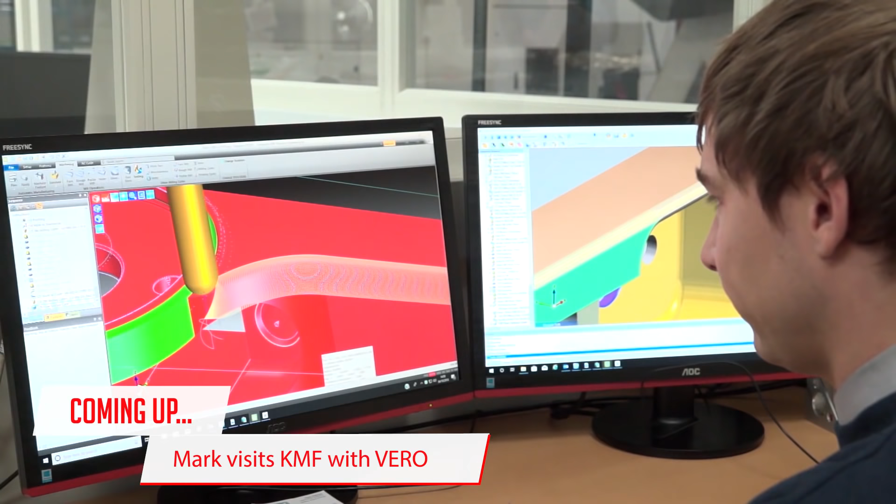We've got a wicked Swarf and Chips show today. The videos coming up are really informative, so it's definitely one to watch. But this is the first week we're back in the studio since Swarf 100. It was amazing, and there's always one that dresses up differently, isn't there? Not pointing the finger or anything. Oh, Colin. Oh, Colin. Top show, weren't it? Brilliant, absolutely spot on.

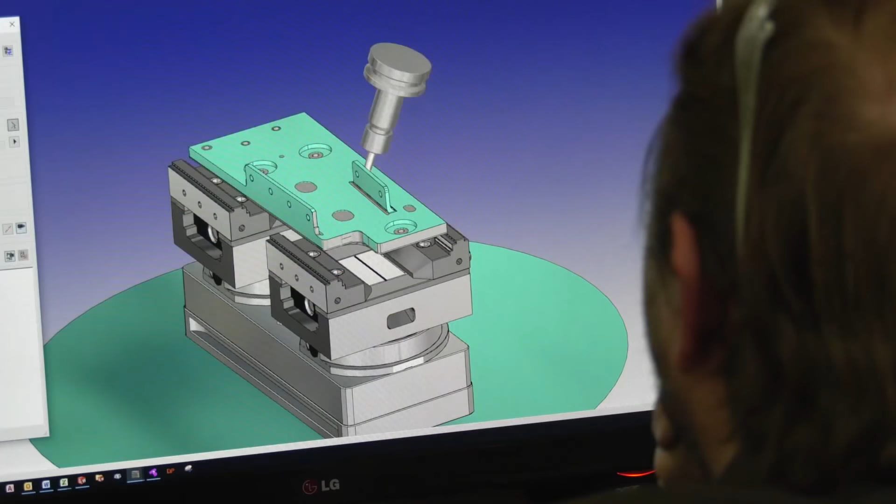Now, in terms of Hypermill, what did you say earlier about when it was machined the first time? Yeah, there was a lot of cycle stops being pressed. Obviously the trust wasn't there first time out the box. I think it took us 2.5 hours for a 40-minute part the first time with all the measurements. In hindsight, we could have hit the button and walked away and it would have been bang on. So you should have trusted it, really. Very much so.

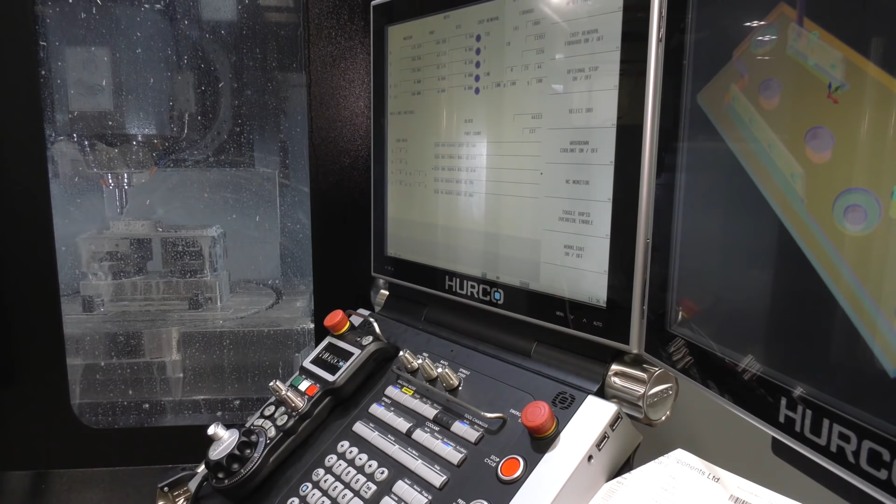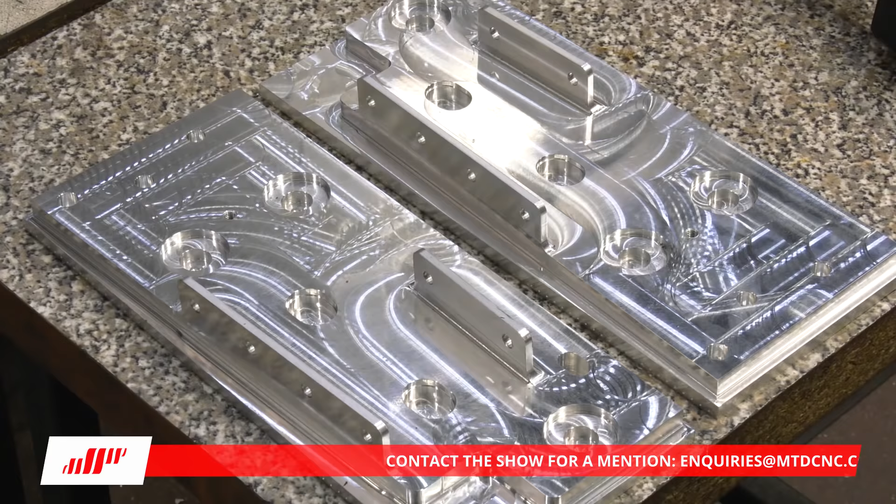But in terms of easy use, this machine and the Hypermill, easy to use? For the lads, yeah, they're pretty good. They've grown with Hurco controls over the last 10 or 15 years. The Hypermill, our CAD engineer Rob, he's took to it really well, and it really is phenomenal. So basically having machine and software together, just essentially making manufacturing your parts a lot more efficient. Very much so, yeah. Right, great endorsement of both products.

Back to studio. Oh Colin, it is so good to see Gareth and how happy he is. It's like me when I get a sticky toffee pudding, when he got his 5-axis machine.

Yeah, I'll say you eat that as well. It's disgusting. Oh no, don't be silly.

We've booted that off. Sorry, Mark, but I just wanted to showcase this video because the passion coming out of Gareth is just brilliant. Before, they were doing 3-axis, 3+1, now with this 5-axis machine they can still do the 3-axis work, it's just making things quicker.

It's just changed everything really, and that part you couldn't really sit there before. But here you can see - those were 2 degrees off, so you couldn't really do that. Loads of different fixturing, plus the software as well.

The fact they were standing over it next to the stop button, they didn't really trust it initially. They weren't, were they? They were a bit nervous. He was looking at the software, and when it was cutting, thinking that's not right, because he's a tried and tested engineer, as are all the guys there. But just the way it machined it, it's just changed everything for them.

And the cycle time reduction, I won't say because there is a cycle time challenge coming up, so watch this space. But just enthusiasm, passion, he loves it, you can see it. And he wasn't confident, and now he is, and it's proved it. I think this is going to take his company forward. We've seen the growth, and it's going to get bigger and better.

Yeah, and he wants to concentrate on subcontract work as well. Known for their hydraulic components, but this just takes them further.

I think he's passed on that passion to you as well. He's saying I'm not passionate normally. No, but I think your passion really comes out in this particular video. And I think this illustrates there's lots of different fifth axis machines out there now, lots of different options. But I love this one personally, this kind of configuration, because it's so flexible - you can use it as a 3-axis, a 4th axis, or a 5th axis.

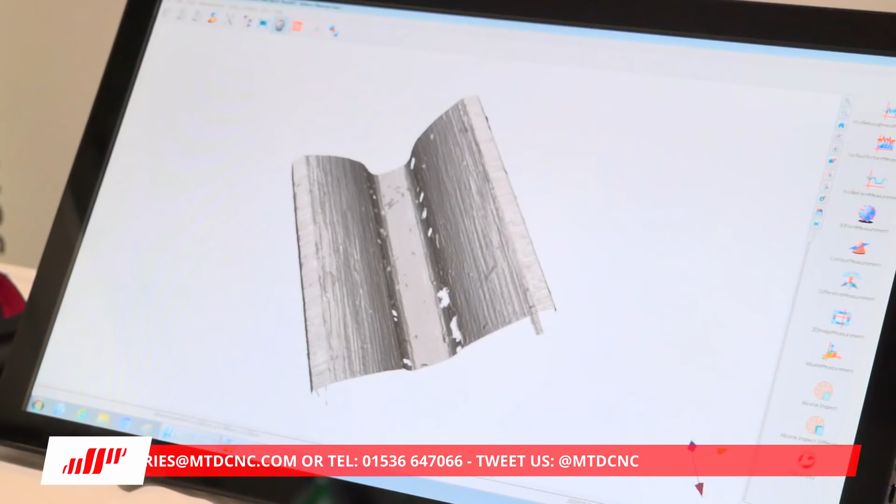Exactly. So many people are maybe thinking we are a tool or kit for laboratory measurement, but we are moving away from this, installing our devices in production on the shop floor. Like we can see here today, we have installed another device next to a turning machine, which will allow us to do an automated measurement of surface finish, as you mentioned before, yeah?

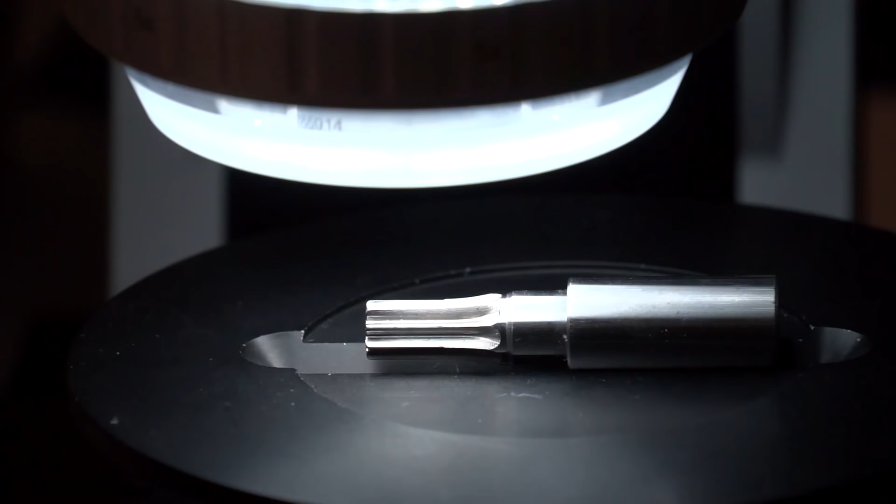And any engineers watching this video that haven't got to the SECO event, what options are available to see your products actually being demonstrated? We have a really nice showroom and office over in Market Harborough. And the message to the engineers I want to send out is come to us, give us a call, let's do a demonstration appointment together, and do some application work together. Great, thanks very much. Good luck, Daniel.

Thank you, Mark. Lovely to have you back in studio, Mark. Passport's back, it's not been surrendered.

So, you know, the machine tool industry is evolving, we talk about it a lot. But is the metrology side of the industry evolving too? Well, recently I've been to quite a big aerospace first-tier supply chain, and I was talking to the quality manager there, and he did say to me, he said, I love MTD CNC, but you don't focus as much on metrology. And I said, look, we can only get as much information.

What I like about these guys is that their products have been based in the lab, but they've actually come out of that and they're actually measuring surface wear. So if you're using a tooling solution effectively, you want to know at what point the tool is not being optimised or could break.

Yeah, the industry's changing. We talk about automation, don't we, Gio? How are you going to control that? Automation, lights out machining? I think you've touched on it really, Lindsay.

I think the industry has been evolving in regards to the technology and the processes, so automation and more complex components being manufactured on fifth axis machines, 3D printing, additive manufacturing. Now, these components need to be inspected, but also we're manufacturing the parts faster, so we need to keep pace with that on the metrology side. The way in which we check them needs to be faster. But then also, when you're running unmanned, we need to be able to monitor the tools overnight to know how long that particular tool's going to last.

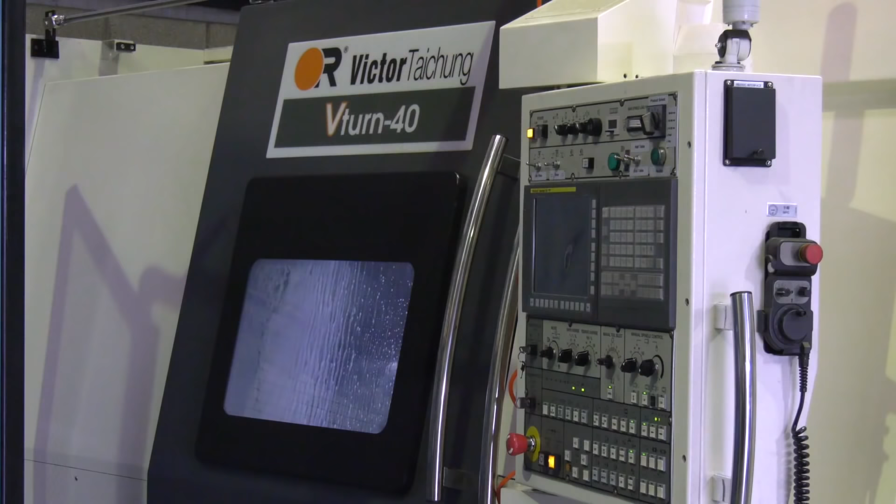Today I'm actually in Ireland. I'm here at Kelly Precision. We always talk about automation on Swarf and Chips, but what about seeing it in action? That's exactly what we've got here at Kelly Precision. I'm going to talk to Jim. Jim, a fascinating cell that you've got here with the Leadwells and also the Victor behind us. Tell us about your belief in automation and why you've embraced it so much.

It's the way forward, simple. It makes us competitive. It makes us run lights out. Without automation, we just couldn't compete.

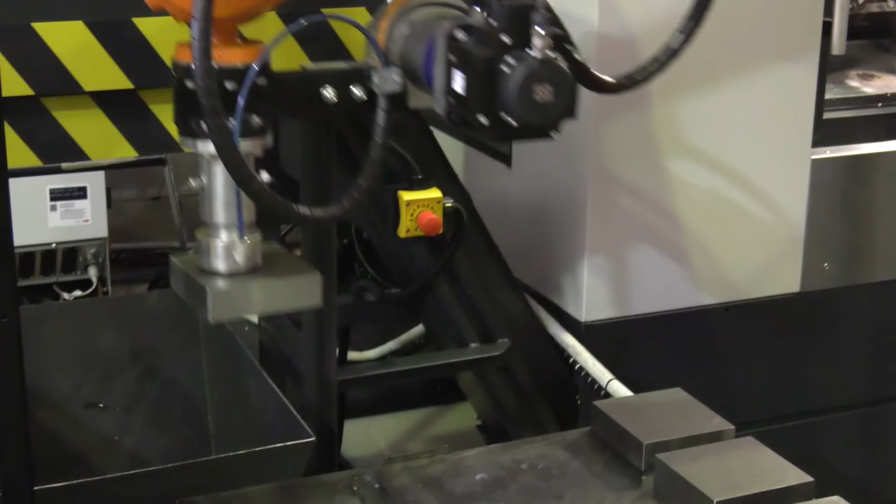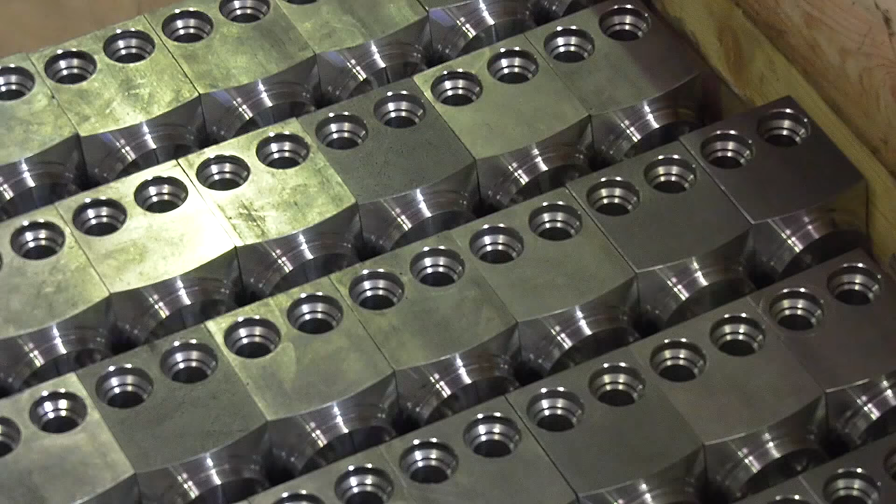Is that the case? I mean, if you didn't have the robots - I think you've got, is it 28 robots on site? We've got 60 machine tools and 28 robots. So if you didn't have those robots, how fewer components would you get out the door? Is there any sort of analysis, 20%, 30% less parts? We will be about 40% down, and maybe more, 50% down on the components we can get out the door.

And we would need a much bigger factory, everything. But with the automation now, we can run lights out, as I say, 22, 23 hours a day our machines work. Doing exceptionally well at the moment.

Founded in 1994, I've done my research. You've just got a new facility as well, a new building which you're about to fill with machines as well. Just tell us how things are for you at the moment here in Kelly in Ireland.

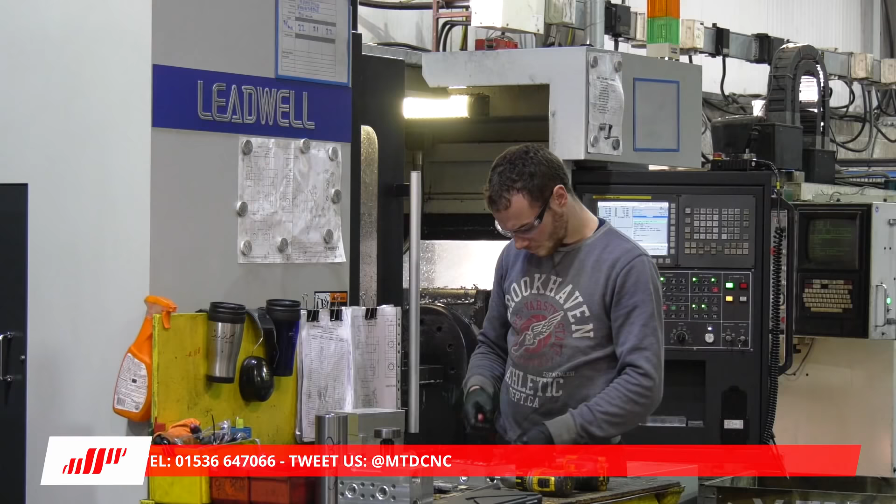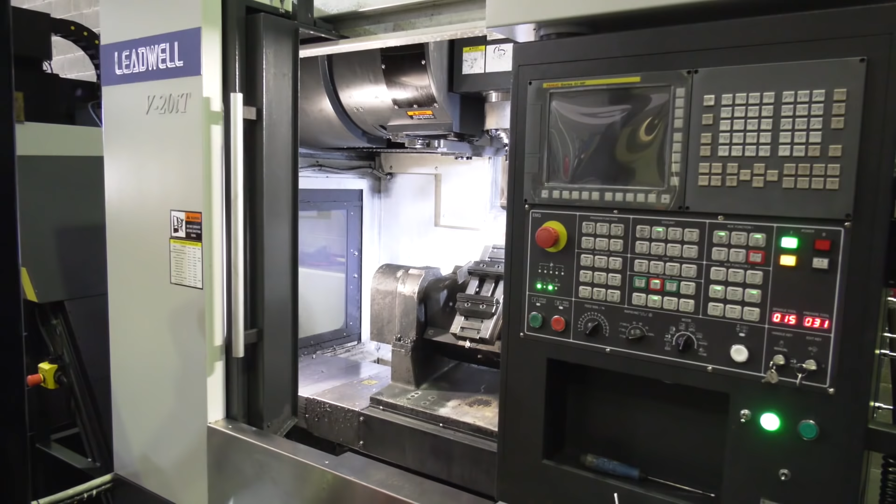Things are going quite well at the moment. We're quite busy, very busy at the moment. We've taken on more staff. We're hoping to purchase more machines and maybe a couple of Leadwells even in the very near future. And we're building a new facility, just 8,000 square feet, adding on to our existing facilities that we have here in this industrial estate. So we're expanding quite rapidly.

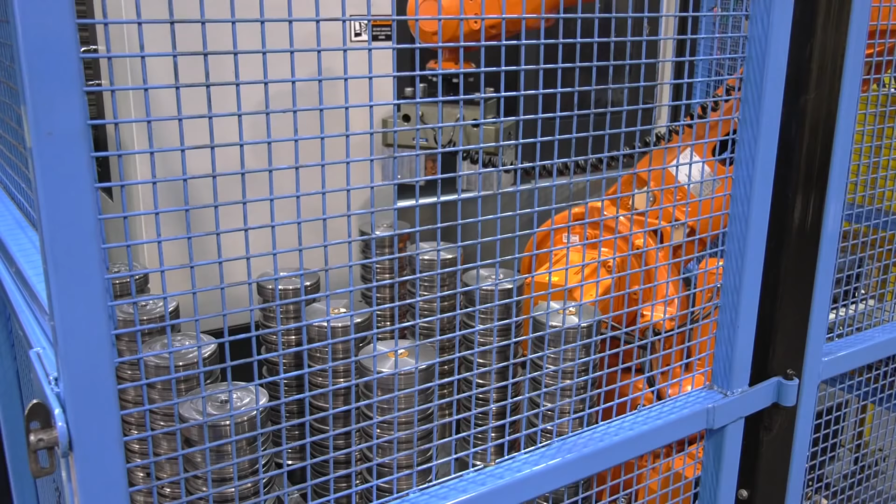What's your strengths? What are you good at? We're flexible, on-time delivery, supply chain. We're able to deal with the customer, solve his problems for him at our end, so that he doesn't have them when he gets our parts. We just can react quite quickly to what the customer wants.

I mean, it's evident here we're seeing 5-axis machining and turning. Are these mainly your strengths, your disciplines here, turning and milling? Do you go beyond that - grinding, boring, gear cutting? Is there anything else you add into the mix? No, we stick with turning and milling because we know turning and milling quite well, and we're quite good at it. And I'm of the belief that the fewer things you do, the better you're going to be able to do them.

So we turn and mill quite complicated parts. As I said, some of our parts can take 60 and 70 tools to complete, making cavities. We make very deep grooves, internal grooves in parts, and we're quite good at that. So we tend to stick with that. Where do people find your parts then, Jim, that you're making? In cars, in aeroplanes, on boats?

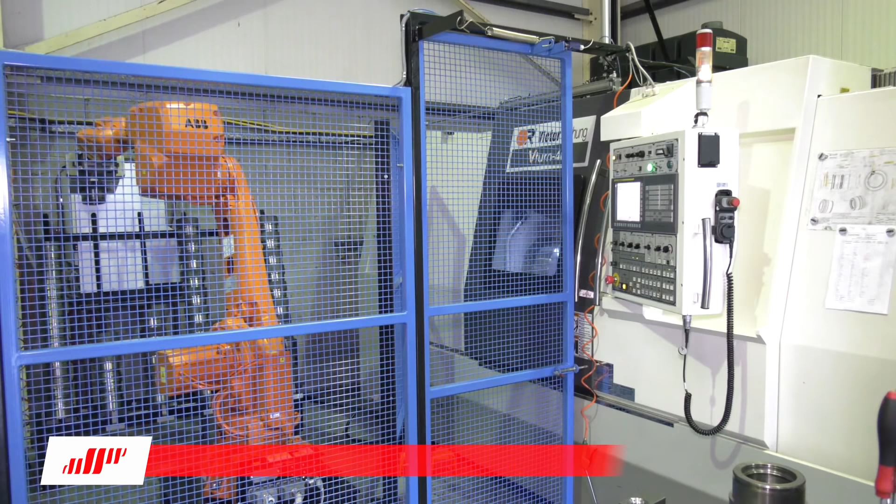And you couldn't do all that if you didn't have automation like this? No, absolutely not - we wouldn't be able to supply the customers the parts they need when they need them, supply them on time, and have the quality that they demand.

Good stuff, I really learnt a lot today about automation. We talk about it all the time, but actually to see it in action here and find out from Jim exactly how much more productive he is as a result has been fascinating. Wow, it really is fascinating - 50% improvement on the amount of parts that they're making.

That's massive figures, it's phenomenal really. I'm loving the ABB robots, but firstly, when you look at automation now, a lot of the machine tool people are having their own automation solutions, and they are an option now. If they are buying a standard machine, they are automation ready, so it can be added from themselves or from a third party, like we see at Kelly Precision there. It's great to see UK engineering embracing this technology now.

Has the day come where you actually buy a machine tool that is actually automated rather than by a third party? I reckon that's where it's going, because DMG Mori, for instance, they've got their own products. I personally agree with that, but there is also that element of disagreeing - if people are specifically dedicating their industry to one thing, the robotics guys are doing that, and then the machine tool guys are dedicating their lives to one thing.

But you used to buy a car and you used to buy your sat nav separately - now it's normally built in. Isn't that true? So I'm just saying, automation is the way to go to be competitive. Definitely, in certain scenarios. I think there's still a place for prototype work where you'll just have your standalone machines, but it's great to see now that the UK manufacturing sector is actually taking it on board.

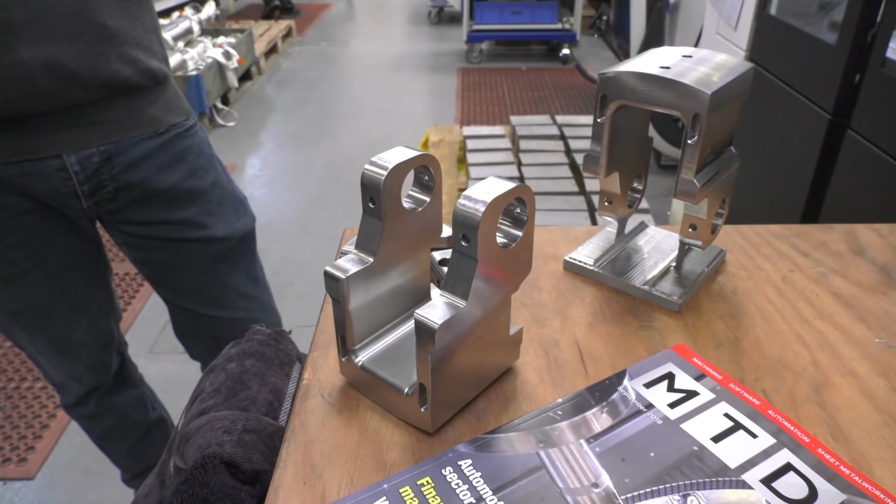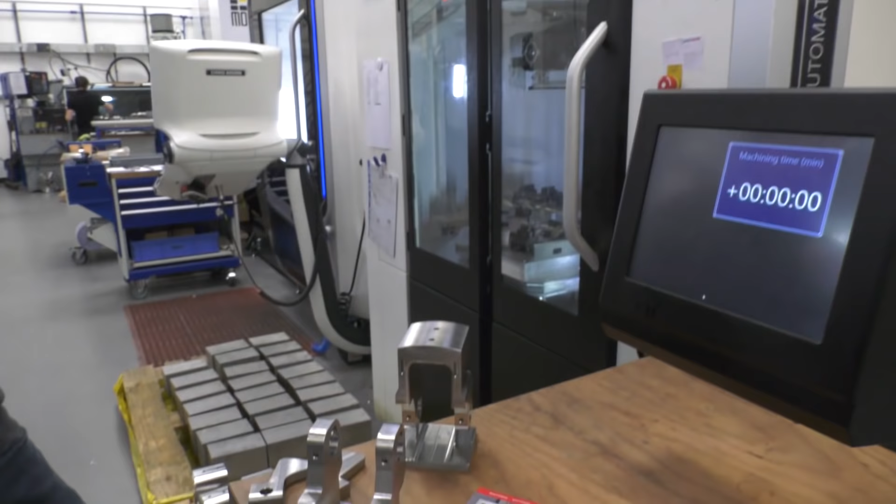Gio was with me, and it was sunny in Somerset, to be fair. But it's a lovely day. The wonderful thing with these guys is they've bought all these DMG Mori machines based on their individual finance package from DMG Mori. Oh, that's what they're doing now.

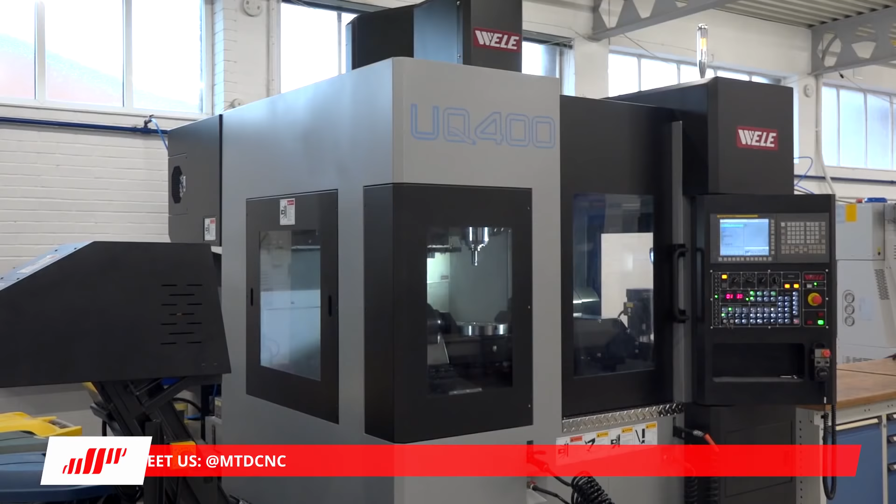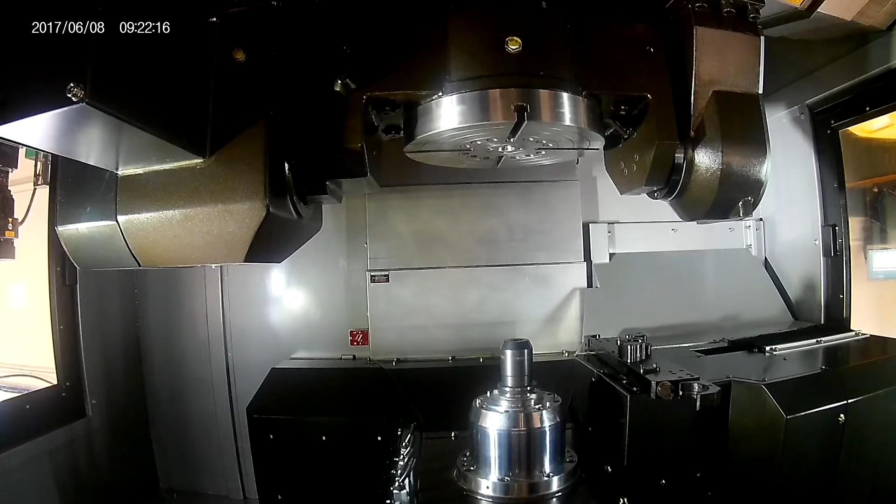How long have you been supplying these at Whitehouse Machine Tools, the WELE product? We've had the WELE agency since the summertime, so around 4 or 5 months now. If you had to describe the makeup of the machines and how they're made, what would your opinion be? Very robust, very strong. They're a good Taiwanese product with all Japanese components in the machine. Really, really strong and rigid machines.

When you look at how this fits in amongst your other machines, like the spinner and your other 5-axis offerings, this is a little bit different, isn't it? Yeah, it's a slightly different setup with what we've got on there. It's a smaller table for smaller components, so it's a little bit different to what we've already got with the spinners.

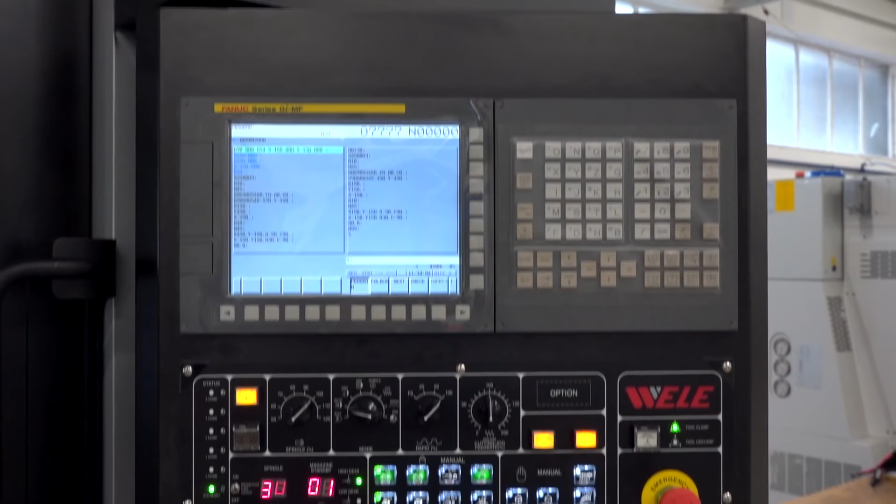Where's the market for this for you, Ian, at Whitehouse? I think for people breaking into the 5-axis market with small components who want to get onto 4-axis machining or 4+1 machining. It's got the Fanuc controller on there, so it's a fairly simple control to use. That's the market we're aiming for.

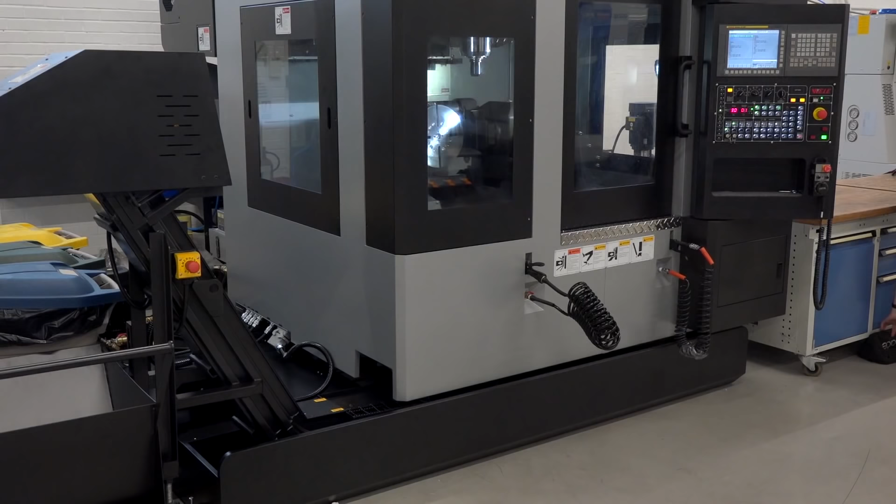Having already sold about 4 machines since you took on the agency, you've done quite well so far. Yeah, we've done very well. We ordered 5 machines at the beginning of the agency and sold 4. We sold 3 of them before they'd even hit the ground. So it's gone really, really well. This could be the next one on the list for someone, and if you want to get this machine you need to be quick. It's a £140,000 5-axis machine, so contact Whitehouse Machine Tools to find out more about what comes with it. Thank you very much, Ian. Okay, thank you very much.

Very impressive to sell 4 of the 5 machines they'd ordered already. Good salesman, I think, and a good machine too. A great machine at an absolutely unbelievable price. 140 grand for a 5-axis machine with Fanuc control, perfect. Great for people looking to get into 5-axis machining, you get really good value for money, and for small components, spot on.

I think with the portfolio Whitehouse have got, with Spinner and also Brother, this fits quite nicely. So when you go into a customer, there's a bit more in the portfolio to say we've got products different to meet your needs. I do hope when people are watching our videos that when going out to purchase a machine, you're considering all these different brands out there, because that's what we're doing, finding the pros and cons. It's going to happen with all the machine tool companies and their individual machines. I think all machines are application specific, and there'll be one machine that suits your application better than another.

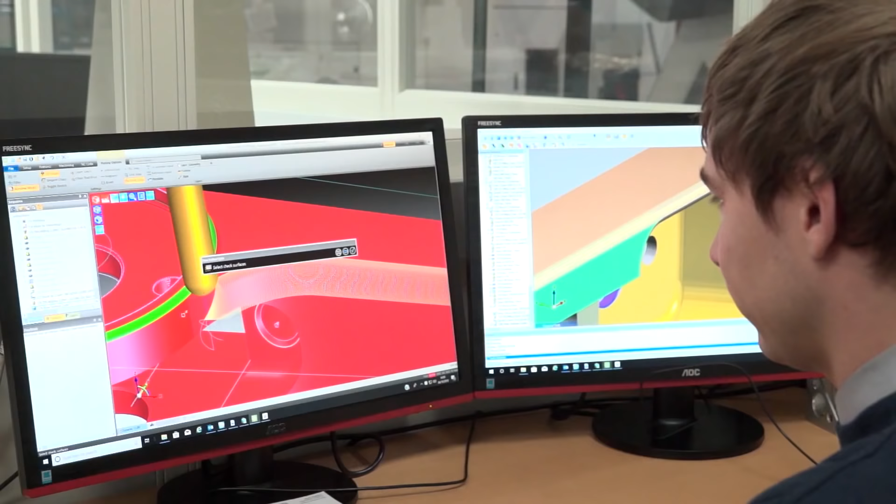KMF and Vero started working together some years ago with our Radan software in their sheet metal company. They've now evolved into precision engineering, so it seemed a good fit from our side to supply EdgeCam to program their machine tools. Downstairs, from a precision point of view, they've gone into the 5-axis area of Mazak. EdgeCam is perfect for that type of equipment, isn't it?

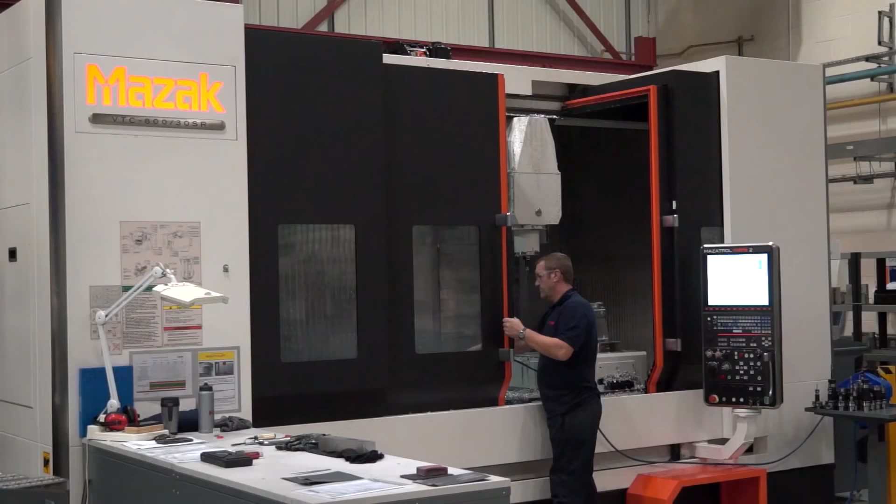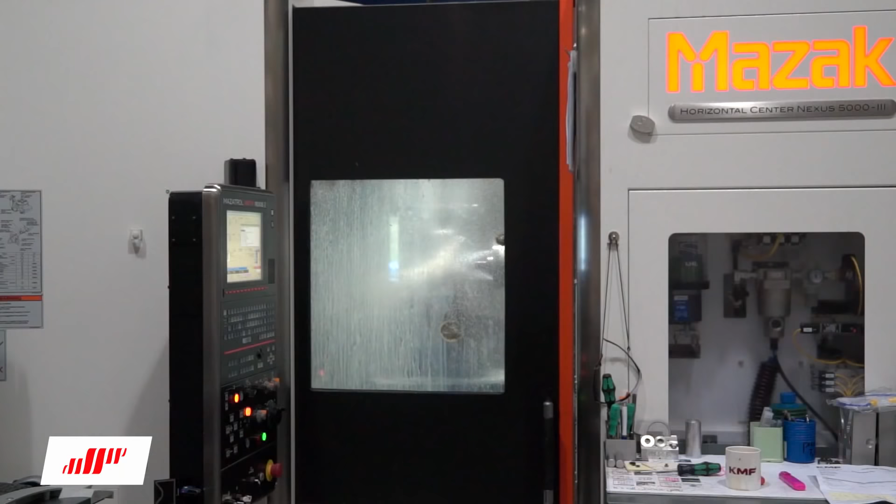Yeah, that's correct. They use it on the Variaxis and VTC, Mazak machine tools, and they seem to be going along well with it. One of the programmers had done his first 5-axis part prior to doing the training course, which was quite a surprise.

When you look at companies like this, it wasn't an easy process, because they still had to bid for the actual purchase of EdgeCam. They like to negotiate hard, and they did their due diligence and looked around at the marketplace. But I think the relationship we've got with them through Radan so far is what sealed it in the end.

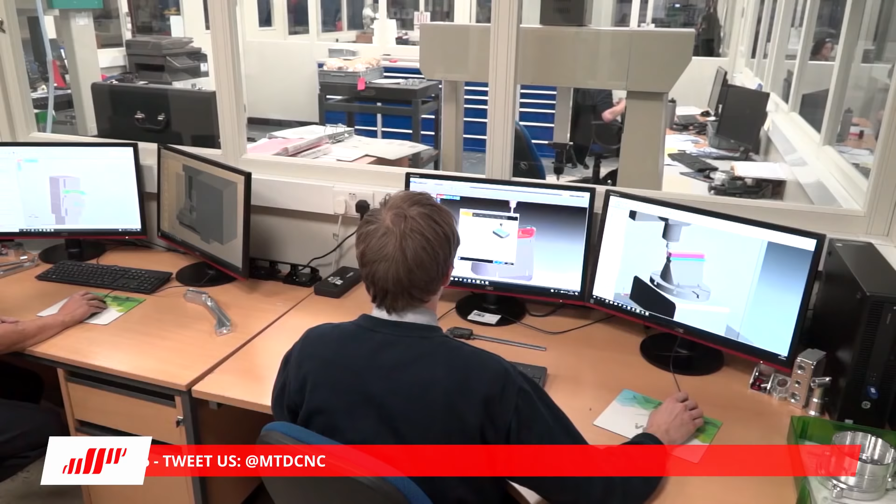For engineers who don't know the full background of Vero Software and what brands you offer - really it's pretty much most production engineering solutions now. Radan for sheet metal, EdgeCam for milling and turning, Work NC for very high-end 5-axis finishing and roughing, and Visi as well, which is very popular in the mould and die market.

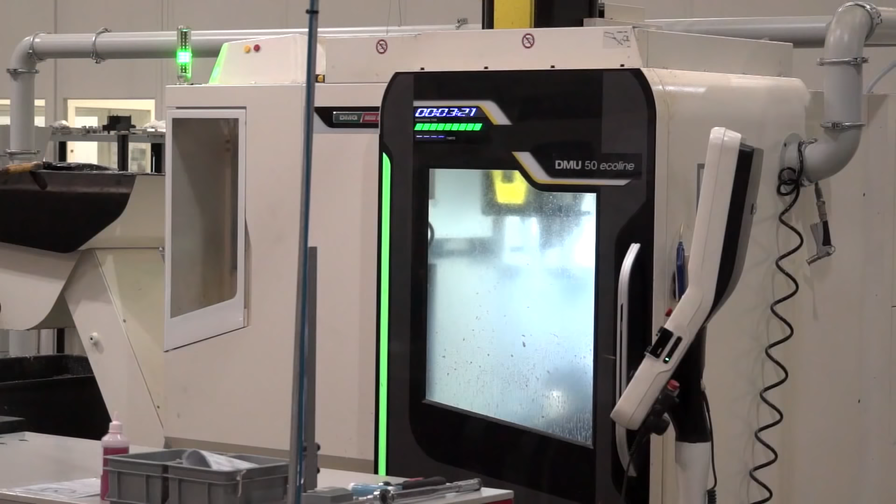You said earlier when we were with KMF downstairs that a lot of people buy machine tools and then rush in to get the CAM or CAD CAM. KMF were a little different - they had a very fresh, methodical approach with a very phased-in training plan, and I believe that's helped them with the success of where they've gone.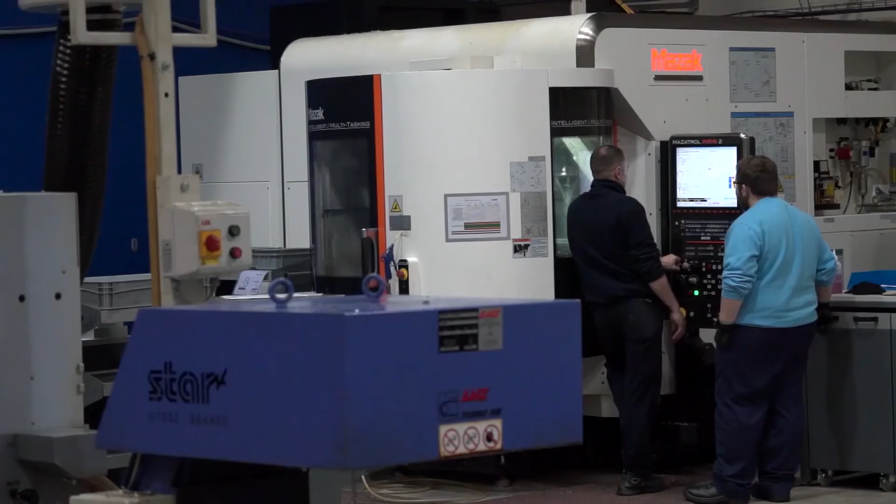One thing I read about KMF is they've got a big apprenticeship program. They've actually got their own training apprentice centre, and here at Precision Engineering, in the middle of the shop floor, there are manual machine tools with apprenticeships going through. What Vero Software are now offering KMF and our other customers is free apprentice training courses with our software.

For any engineers that don't know Vero Software, what would be your message to them? Challenge us, give us a try. We are the world's largest CAD/CAM suppliers, and we believe we have very, very good solutions out there.

So a product goes out to tender, they've checked all their due diligence, and they still choose Vero. KMF Group are one of the UK's largest sheet metal companies by far, and they've been using Radan for a number of years, so that probably gives Vero a bit of advantage straight away. But EdgeCam is so well known and well supported, and Vero have been bought by Hexagon Manufacturing Intelligence, so they're part of a really big group. They've spent a lot of money on sophisticated machine tools for the 5-axis side of the business, and EdgeCam has been fantastic for them.

I like the niche products they offer for each particular application - a specific product for each area, not just one for everything. I think that's why the loyalty is there, because they can branch out to different areas of the industry too.

I think the relationship is all about relationship. Justin's been around for a number of years, and every customer I know he's been into, he's got a great relationship with them. He's a lovely bloke, a nice chap.